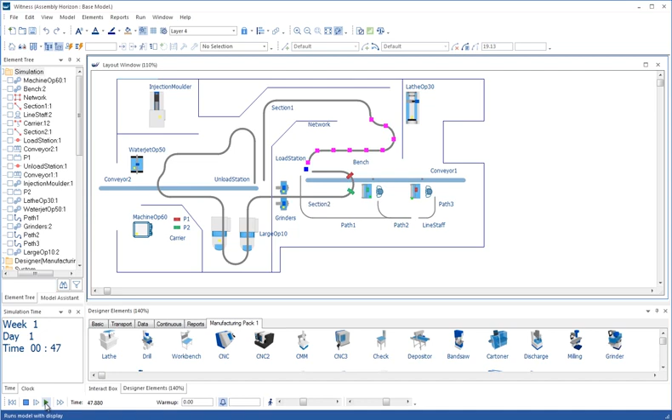Welcome to Witness Horizon. The headlines of this release include a great new coordinated look and feel that aligns your 2D and 3D workflows like never before. New toolbar buttons, tree icons and designer element sets give a fresh boost, and the new floating toolbar means faster modelling too, with common changes more easily to hand.

Witness has always been a byword for fast modelling, but it's just sped up. Improved rendering of graphics shows in the new anti-aliased path displays for conveyors, tracks, paths, power-free sections and buffers. And this release offers more in the ways of graphical manipulation too.

Create impressive animations with the new rotation and movement of graphical items in 2 and 3D. For those customers who use the continuous elements in Witness, tanks, processors, pipes and fluids, this release is a watershed, with a range of additional precision, new rules and new displays offering easier, better modelling.

The general new look and feel of Witness includes a range of new coordinated 2 and 3D icons. Both the Manufacturing Edition and the Service Edition feature new packs of elements on a new Designer tab. These can be used to create 2D displays that turn, at the touch of the new Quick 3D button, into high-quality 3D models.

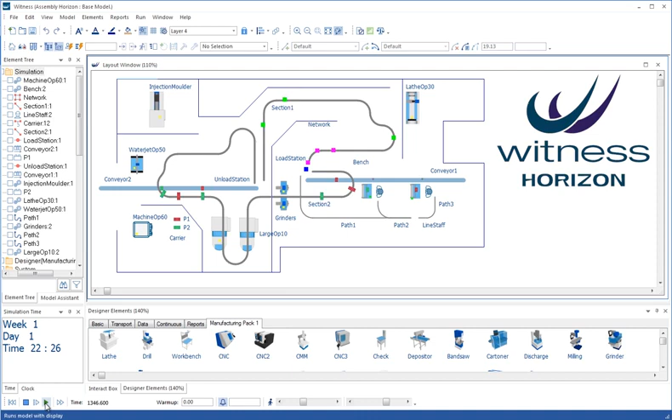Our 3D offerings continue to be underpinned by the best. The integrated 3D views and the optional immersive 3D platforms being powered by Virtalis into the latest headsets and power walls. Witness Horizon is built for speed and quality of presentation.

Let's have a look at the release in more detail. This is in the Manufacturing Edition of Witness. There is also the Service Edition, which we'll have a look at a little bit later.

On the Start page, you have access to a lot of information. For example, all the recent models that you've used for easy access to those. You have a Getting Started section. When you click on that, it takes you through to the 2 Learning Witness books, all of which have been redone for this release. Essential reading if you're going to start using Witness for the first time.

We've also put in this section now the Witness Horizon release notes. So if you're interested in learning in even more detail than this session gives you, then please have a look at those release notes there.

Then there's a link to some new video tutorials to take people through in detail how to begin using Witness. Then a link to sample models in Witness. Every single model has been updated for this release. So there are a lot of models in here.

We'll have a look at a few a little bit later, but a lot of these models have been updated to illustrate the new features and the new graphics, especially in Witness Horizon. A new quick reference guide with all the new functions and updated toolbar buttons and the like. And then a range of other access to other information, including the Witness Support Portal.

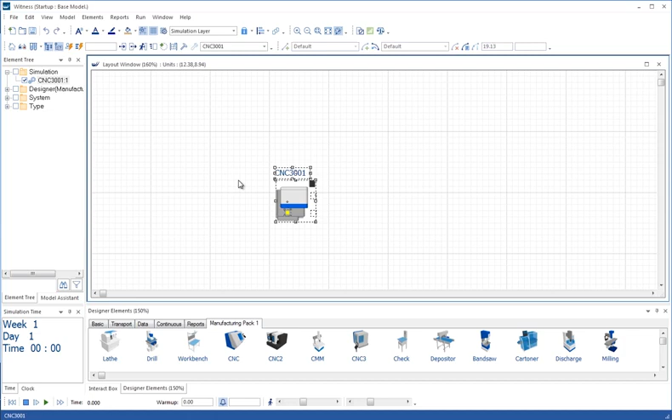When you drag one of these elements onto the screen, you get the 2D element for it. Let's drag in a whole load of different ones here and see how that passes through into the 3D display - we'll bring lathe 3 in, one of the presses, etc. These are all scaled to suit the general scaling in Witness, which is a distance of 5 meters for one of the large squares. We say 5 meters, but we actually term it units, so if you wanted to work in other units, that's entirely up to you.

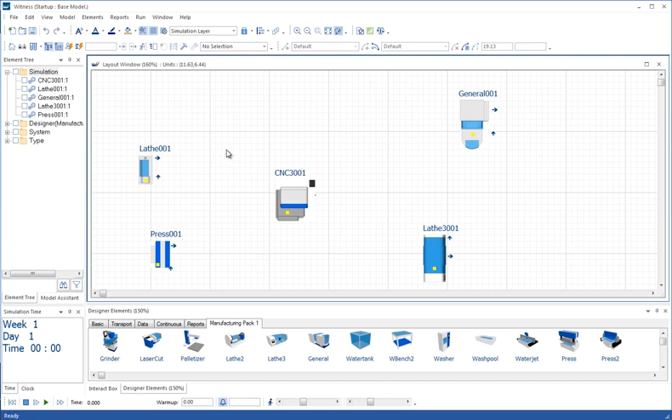You can redefine the scaling on the Model, Options, Coordinates tab. Let's use the new 3D button to create a new 3D view, and you'll see that exactly the 2D layout you have has been faithfully reproduced in 3D. I'm flying around that just to show you how easy it is to navigate around the 3D view using the standard commands.

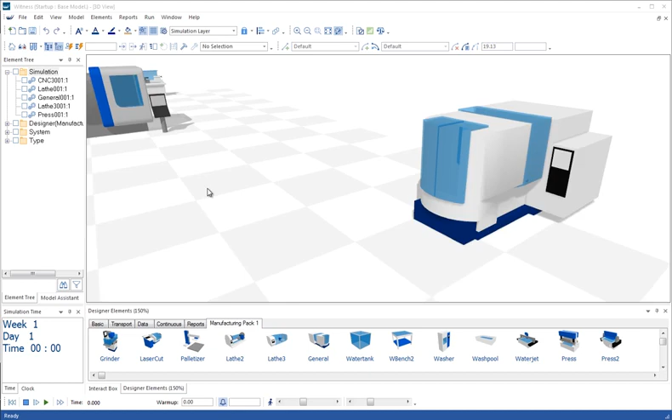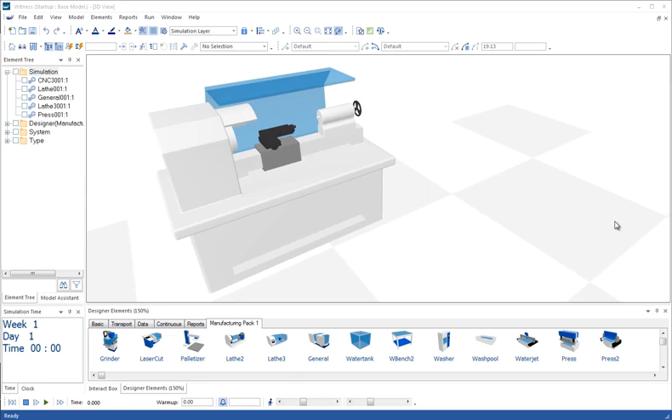We make a lot of use of transparencies in the new Witness elements, so you can easily see the different parts being processed in many of the machines. Some of them we've left open like this, again to ease that view. I'll just turn the shadows off - that's an optional item in Witness. It's all extensible, so you can add your own 2D icons and your own 3D shapes, but we've given you a much better start in that area with this new coordinated library.

Here's the service version of Witness as promised. You can see some of the new elements in the service pack here - a lot of health elements, elevators, escalators and the like, servers, phones, laptops and various desks.

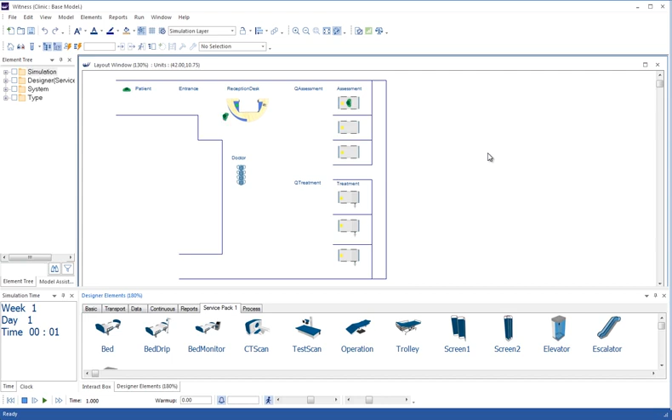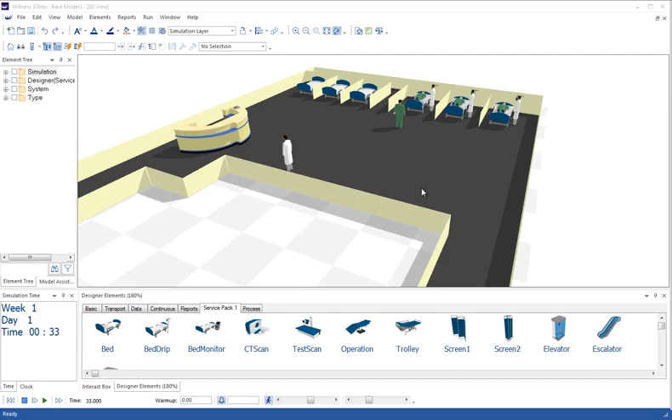And here is a model that is the new tutorial in the Learning Witness book 1 for the service edition, where a little clinic is a model that you build from scratch yourself, following the instructions. This uses the new graphics for the people, some of the beds and the reception desk here. If we take that through into three dimensions, we end up with a very nice layout of people entering the clinic via the reception desk and being tended to on the beds by the doctors in the various cubicle areas.

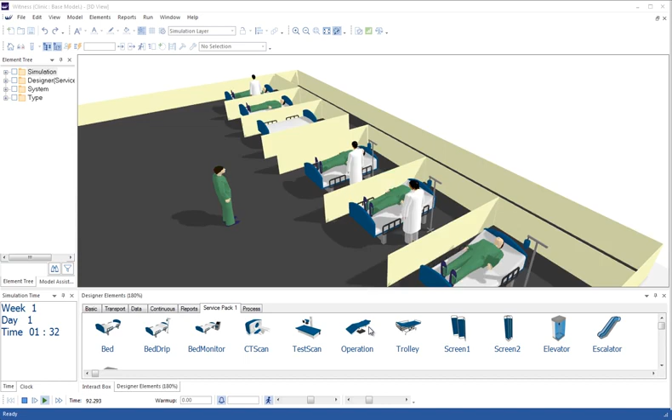This model also illustrates the fact that you can extrude the lines in Witness to create these nice wall effects. Very easy to do, and very effective in making the models look really, really good.

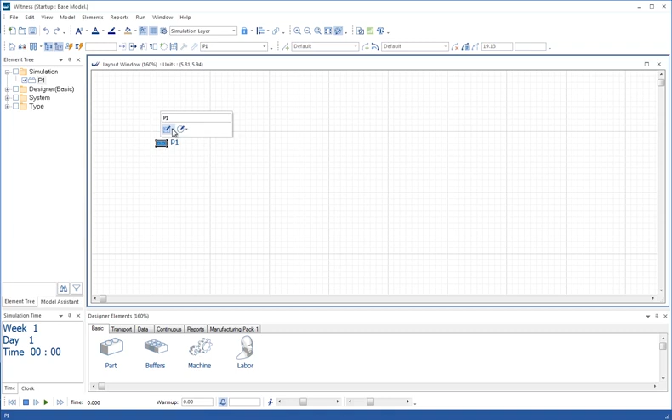Let's return to the manufacturing edition of the software and look at the exciting new Witness floating toolbar. When you instantiate an element into Witness, above that element on the modelling window is shown the floating toolbar. This gives you access to a number of common properties and fields of that element that you can edit. Here I'm changing the name of the element to P1, hitting return, and that change has been effected on the element backdrop. If I right click on the icon here, I can use the icon selector to change and pick a different icon for that element.

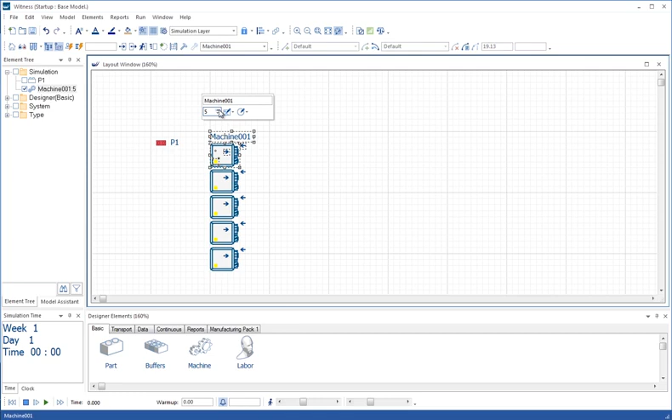Here I'm picking the red icon for the part, and of course this works with other elements too. So if we bring the machine in here, for example, the floating toolbar appears and I can change the quantity of that machine to 5. I can drop into the common properties here and change the cycle time to 3.0. I'll just click away somewhere else on another field to write it away, and then click away and that change will have been effected. If we look inside the detail dialog, we can see that the cycle time is 3.0 - that change has been made.

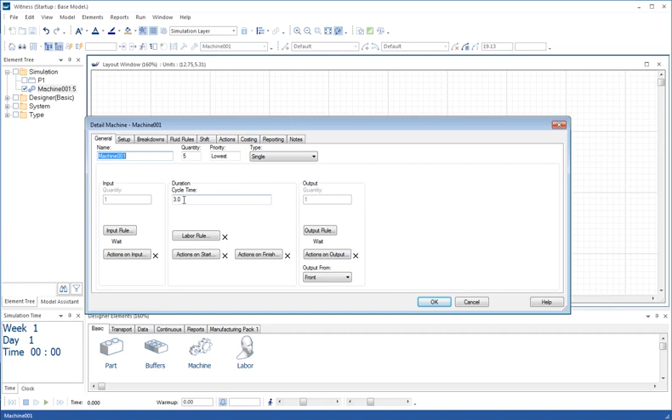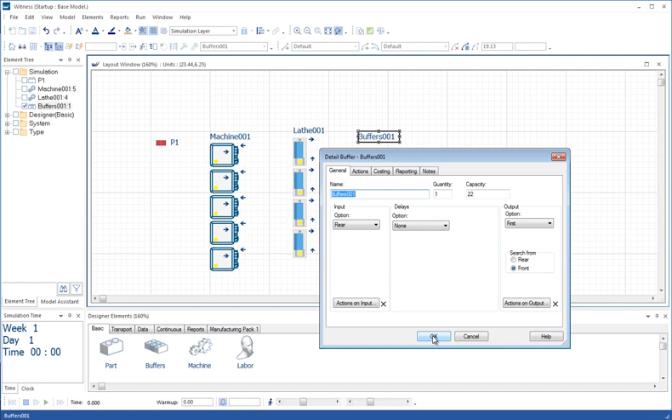It also works with the elements in the various packs - if, for example, we want 4 lathes, it's as simple as that. It works with buffers too: if we bring a buffer in, we could set the capacity of the buffer this way. Click elsewhere, click away to set, and then we can see the capacity has indeed been changed to 22. So nice and simple - a real productivity aid, giving you the ability to change common properties, firstly when elements are instantiated, and secondly whenever you right click on an element to bring up its right mouse menu, where the floating toolbar reappears giving you access to these common properties.

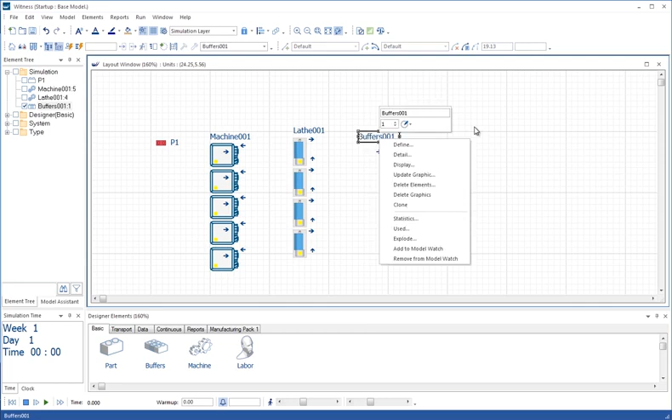Let's also look at the new part scaling in Witness, which is the default setting now. When I drop a part from the designer elements and double click on that part, we'll see in actions on create we have length, width and height set. Those are automatically used to generate the size of the part as it will be seen in the model displays.

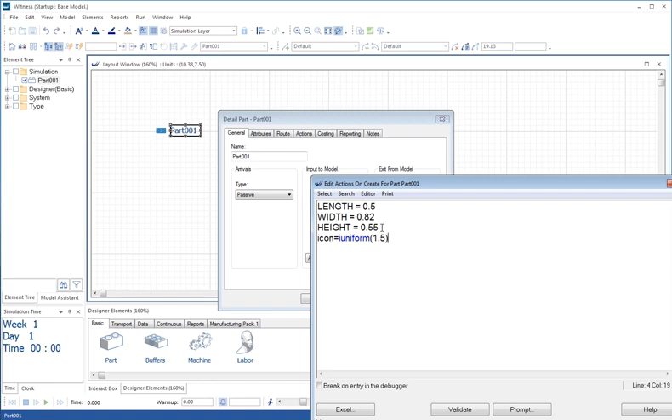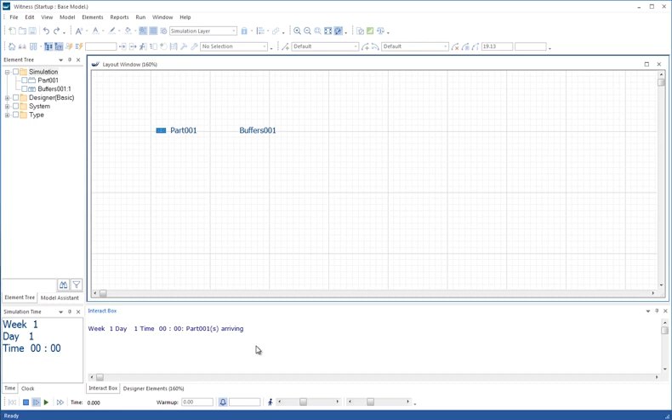I'm going to add an extra line here and change the icon to IUNIFORM(1,5) plus 130, which means I'll get different coloured bricks coming into the model. Then I'll add a standard buffer and route into it using the visual output rule button. It will prompt me for how often the parts arrive. So there's our first part arrived, a purple icon, and the different coloured icons are being instantiated into the model.

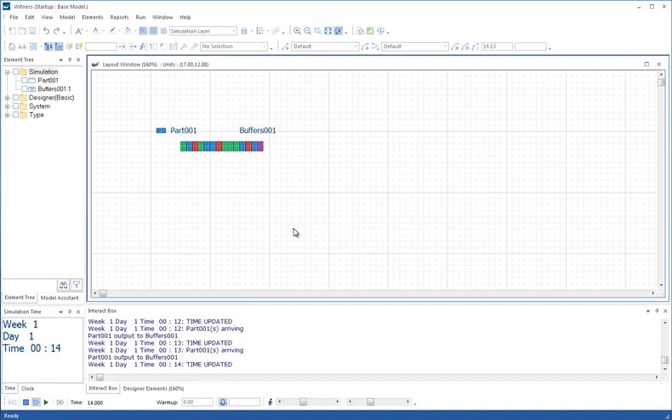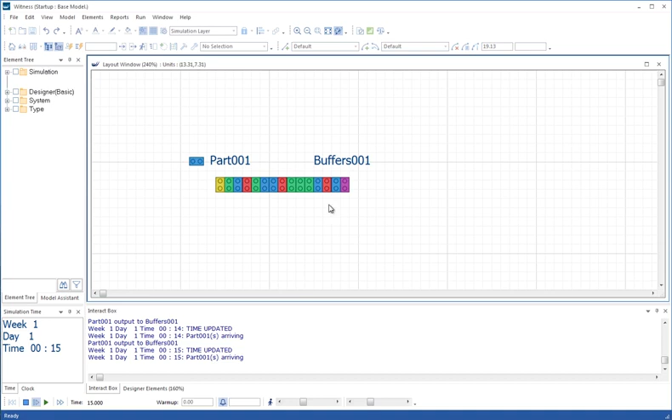So this is how the new icons look for parts, the default part, when they come into a model. But be careful, if you change the part icon and it's really a different size, then you need to change the part size in the actions on create here for the length, width and height, with height being used in 3D for the element.

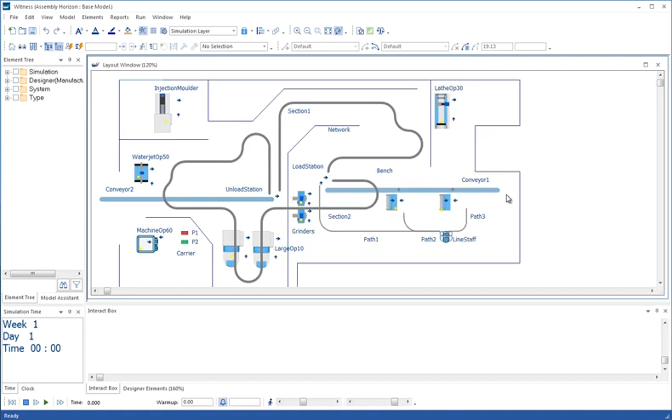Let's look at a couple of the sample models in the manufacturing version. The first one I'll open is Assembly Horizon, and this is a good demonstration model for the new look and feel in general of the new release.

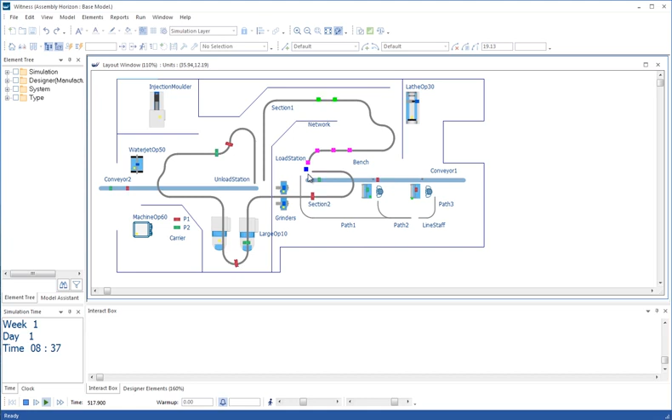If we set it running, you'll see power and free elements arriving to a station where the parts are loaded, coming along from two workstations. People are moving along a little path network here between their workstations, and when the load station needs some attention due to it being broken down, the transport around the model on the power and free sections moves it from here to this other conveyor where things move out of the model.

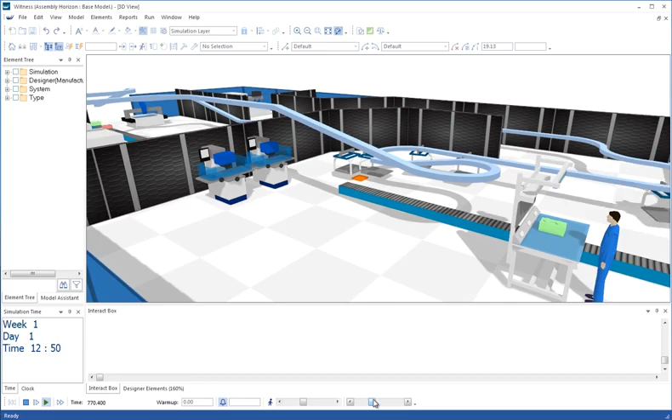If we do a quick 3D of this model, we can see we've used extrusions for the different walls. Let's set it running. Here we see the walking men moving along the path displays, and maybe we need to slow that down a little to see the power and free carriers come along, pick up a part, move up and over the partition area above some other machines, and then we see them being put down onto the second conveyor here.

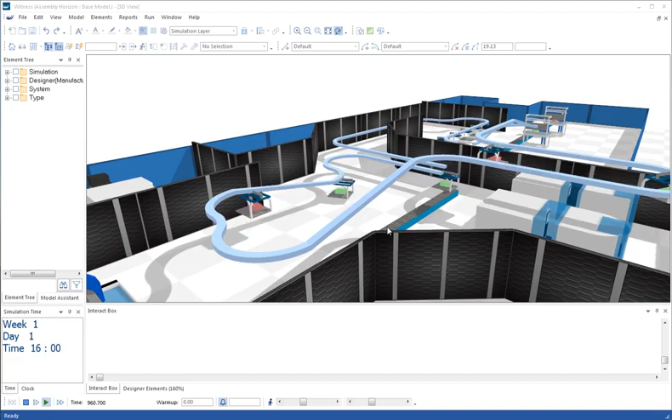So this is a model you can look at in detail to see how it's set up, how the extrusions are done on different layers in Witness. We have the option for shadows on, shadows off, and wireframe in the 3D view, as standard, as was in Witness 14. But the crisper, better appearance of the 3D machines and graphics means that Witness Horizon is a step up in terms of 3D appearance and performance.

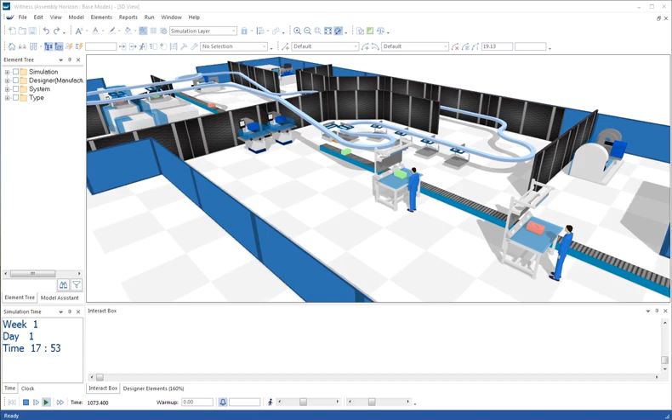Let's have another look at another model here from the Manufacturing Sample Models directory. Here's one of the process cell models that we have in Witness, where people follow work around a process cell, working on it at each workstation.

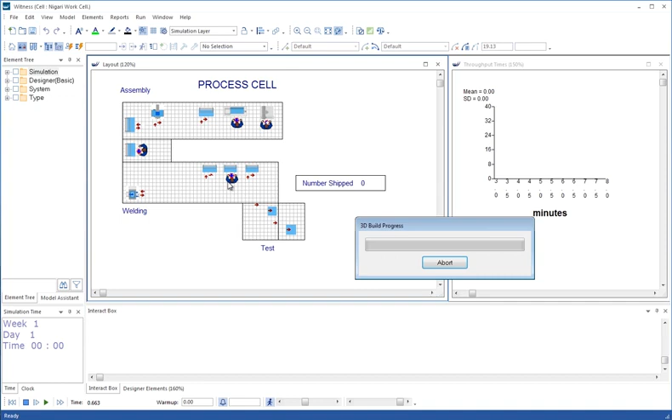Let's stop the model and do a quick 3D view of this. Here we see the upgraded version of this display with the people walking around from station to station doing the essential work that's required.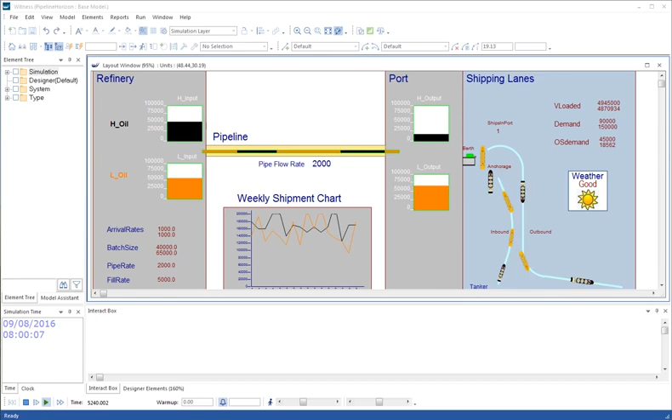Let's take a look at a new model called Pipeline Horizon. This helps explain and show the new look and feel and the new options available for the fluids changes in Witness Horizon. There are many improvements in calculation in Witness Horizon.

The release notes give a link to the Wikipedia reference for Kahan summation. This is an algorithm we've implemented in Witness Horizon that adds up lots of remainders in calculations and reapplies them at the point where they accumulate to a certain extent.

Added to that, we have higher resolution of a lot of different numbers. For example, before and after the decimal point is represented as two values in many calculations rather than a single value. This gives us higher precision, especially where there's high flow rates and small quantities of fluids left in tanks. Time also is calculated and stored as two numbers, the value before and after the decimal point, and there are improvements in the numerical comparison operators using a scaled epsilon when comparing numbers for equality. Those techniques ensure greater stability as well as precision when representing fluids.

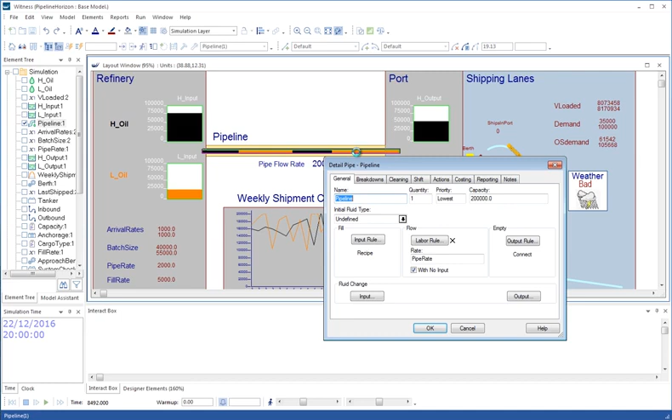There are new rules and options available in the fluids area as well. For example, the output rule for this pipe is a connect rule, which connects a certain fluid type to a certain output and another fluid type to another output. That easy splitting of fluids into different tanks is something that was more difficult before.

And also you can now flow out of a tank where there is a mixture in the tank. You can flow out a certain liquid out of that mixture, which helps modelling, for example, separations. So for instance, oil and water, where you let things settle for a while and then you may draw off the lower or the upper layer from that tank. So there's new rules, that new connect rule and flow rule; being able to specify fluids for part of the flow is something that is new and very powerful in the new Witness release.

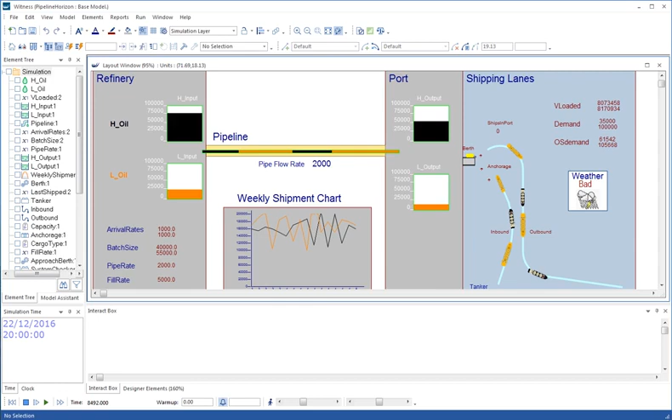We also have the option in Witness Horizon to interrupt parts filling with fluids. This is the interface between the discrete and continuous worlds. For example here, if I double click on weather, then we can look in the actions on start of bad weather, and here we're looking to see whether a ship is above 80% of the fill that it was going to get when the bad weather starts, which interrupts the filling.

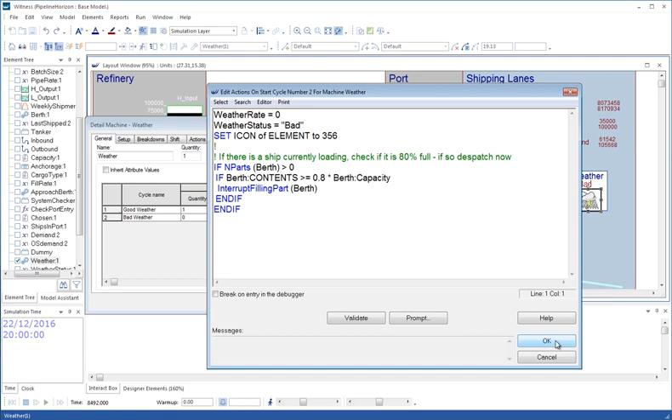And we actually use a new function, interrupt filling part, to stop that filling and send the ship on its way if it's more than 80% full. So new functions to interrupt the filling or emptying of parts.

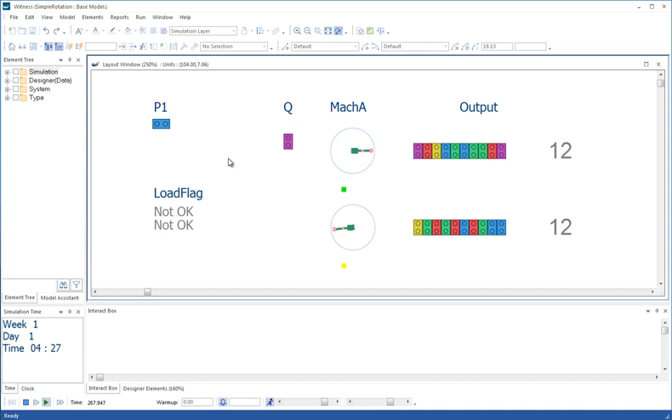Now let's take a look at some of the exciting new animation possibilities in Witness Horizon. In this model, we rotate the robot icon as the robot machine A is cycling. How is that effected? Well, let's go into the detail for the robot, and on the cycle here, in actions on start, we're looking to see where the machine icon is situated.

This is machine A icon 1, the number 1 icon, getting the X and Y position of that. And then we're leaving it where it is with the move position command, but we're rotating it by 180 degrees over 10 time units, which will be set equal to the cycle time, and we're updating the animation every 0.1 time units.

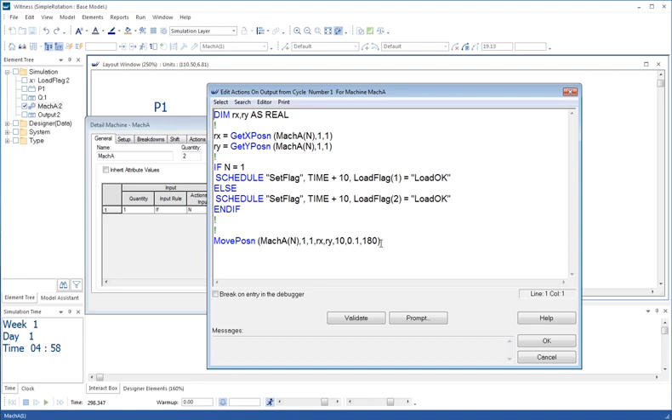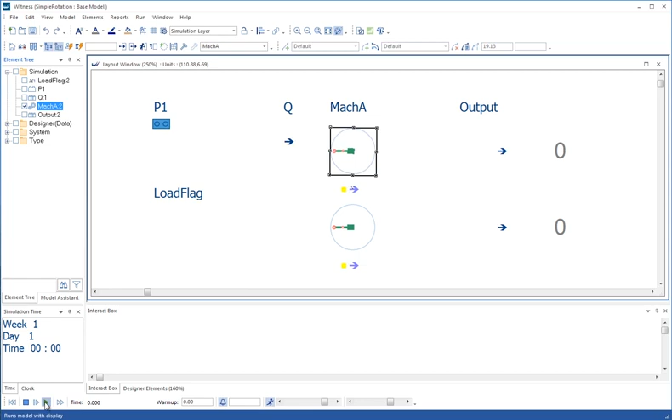And then the return for the robot is just done in the actions on output here, where we're rotating it by another 180 degrees to return it to its loading position while it's not actually loaded with a part. We could change that second action to be minus 180 degrees, in which case the robots will return back using the anti-clockwise motion for the return movement.

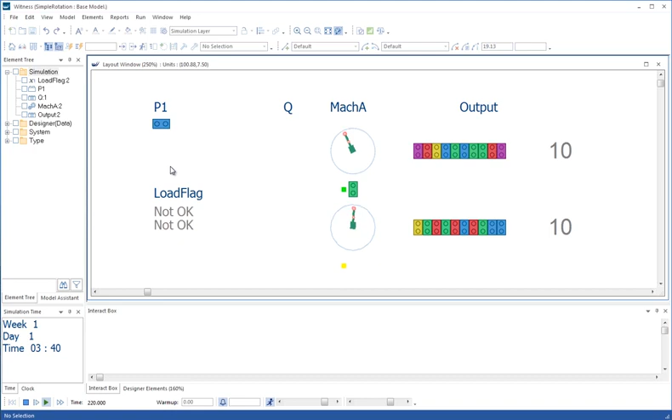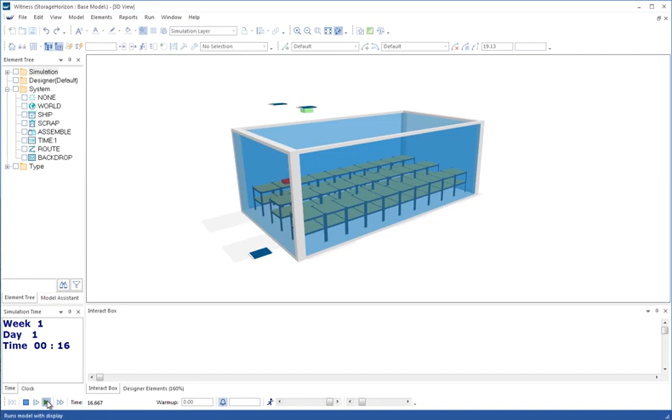Now in a different model, in Storage Horizon, not one of the sample models, but this will be made available via the portal soon, we see a 3D view of a model. And if we start the model, we can see that the cranes here are lifting and placing items in storage in the tank area here. Now these are machines that are moving, so these are crane machines, and of course we can run these at a variety of different speeds for the movements.

This model actually also makes use of another function which is called slow motion setting. That tells you the position of the slow motion slider bar that I'm showing with the cursor here, and will return a number based on where that position is, such that if you want to run the model more quickly, you can put in a higher figure in the update interval for the movement.

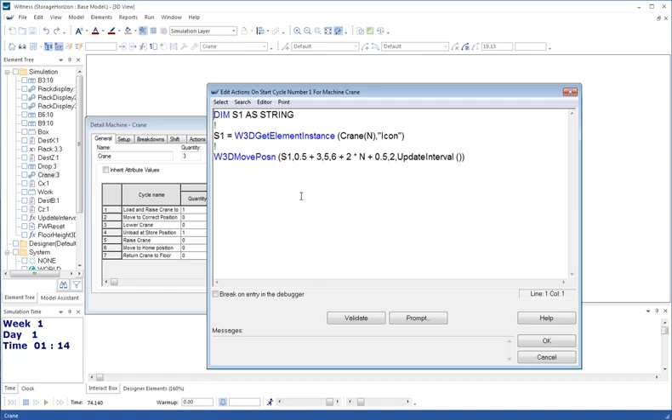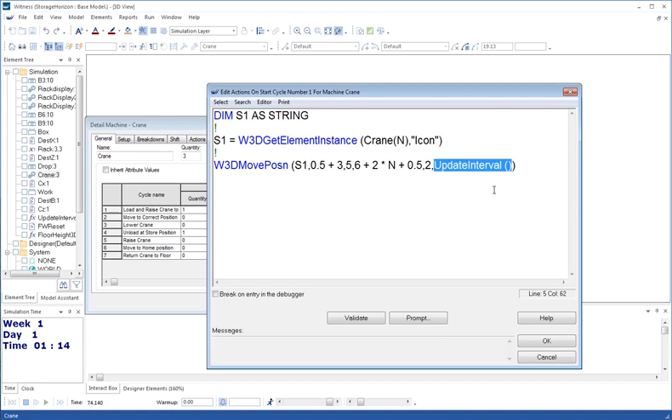Let's look in the tree here on the cranes, and let's look at where that movement is done. So the movement for the crane here is done in 7 different cycles on the multi-cycle machine. And if we go into the action here, we're just doing this movement in 3D, and we're finding out the identity of the geometry linked in 3D for the icon of the crane, and we're doing a W3D move position function to change the position of that to a new XYZ point over 2 time units, and this is the calculation for how often we're going to update that animation in update interval.

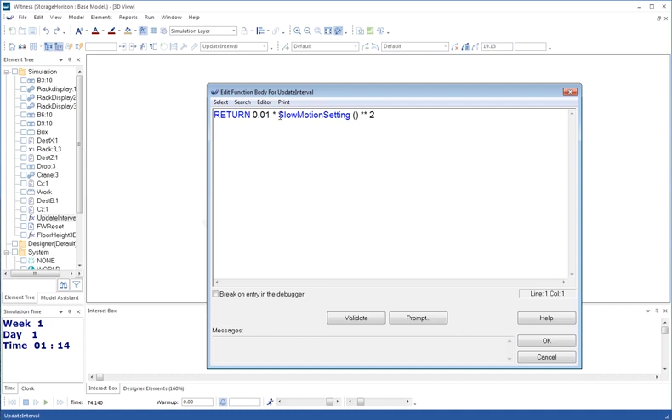If we go back to the tree, we can look at update interval, and you'll see that's using this new slow motion setting. I'm actually squaring the value of that. It returns a value between 1 and 10, 1 being the slowest setting. So that will return 0.01 right up to 0.01 multiplied by 100, which would return a value of 1. So quite a significant difference in how often the values here are being updated.

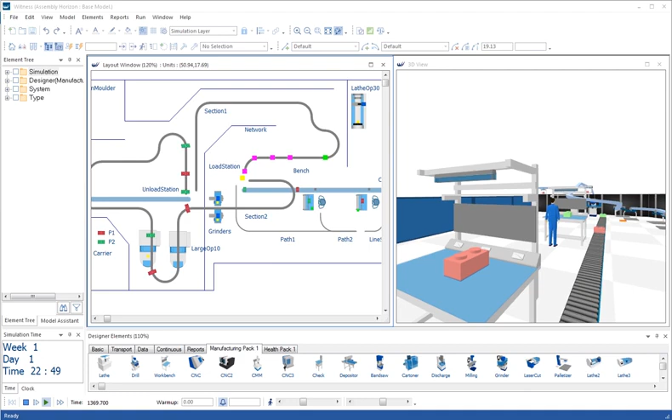Witness Horizon. Fast, productive modelling that looks great too. I hope you've enjoyed this introduction and are inspired to explore and see what it can do for you.